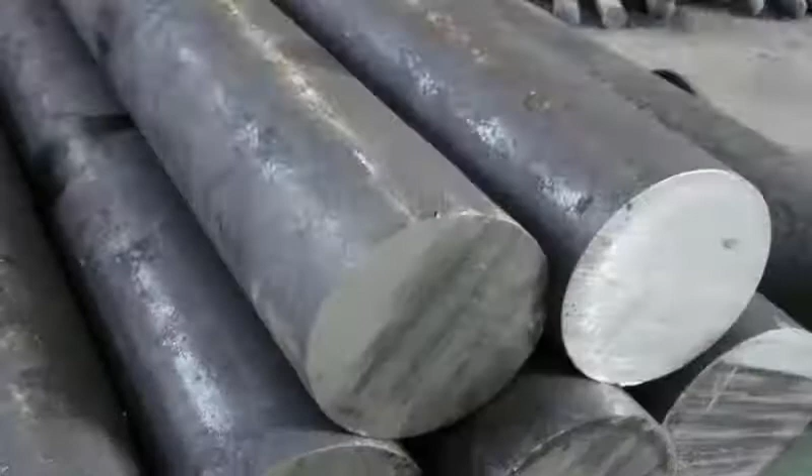So let's move to the topic of today. Have you ever wondered why steel is the only reinforcing material we use for concrete? There are several materials. We have gold, there is copper, we have iron, there is aluminium, and other metals and alloys. Of course, we can't use gold because everyone knows that gold is expensive, and it will be so uneconomical to use it just for reinforcement of concrete. Like, who does that? So if it is not gold, fine.

So why can't it be other metals, other materials, fibers? Any kind of material. For example, why can't it be iron? We all know iron. Steel itself is an alloy of iron and carbon. So why can't we just use iron, which is the original form of steel, to reinforce concrete? Why do we need to alloy it with carbon before we can use it?

I've been curious as well, so I made some research which I'm going to share with you today. But before I do that, I want us to recap on why we even need to reinforce concrete at all. This is different from the main topic. The main topic is, why do we use steel? Is steel the only material? But before then, I want us to talk about why we even reinforce concrete at all.

So let's get started. There are three major reasons why we reinforce concrete. We have several reasons, but these are the major ones. Number one is to increase the shear strength of the concrete. Number two, we want to increase the tensile strength of the concrete. And number three, we want to increase the compressive strength of the concrete.

These three strengths are so important in concrete. If you have a concrete that lacks all these three properties, then you are playing with failure. There are several reasons, as I've said, but the three major ones are the ones I've mentioned. There are others, like to reduce cracking, or to prevent sudden creep or sudden failure.

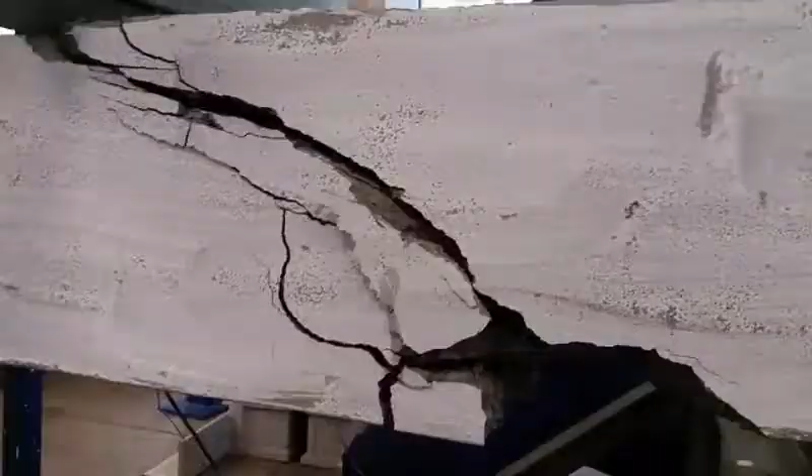Okay, so this is what shear failure looks like. This is a beam that has undergone shear already. This is the shear plane. Look at this diagonal plane. See this? That is the shear plane. The part of the beam at the right is trying to slip over the part of the beam at the left. So this is what shear failure is.

So this beam has undergone shear. Why? Because it lacks shear strength, or there is limited shear strength to it. There is no reinforcement in this beam, so it is a mass concrete. This is what we don't want to happen to our beam, so that's why we want to reinforce our beam. The shear stress being induced in this concrete due to the external load is greater than the shear strength of the concrete. That is why it is undergoing a shear failure.

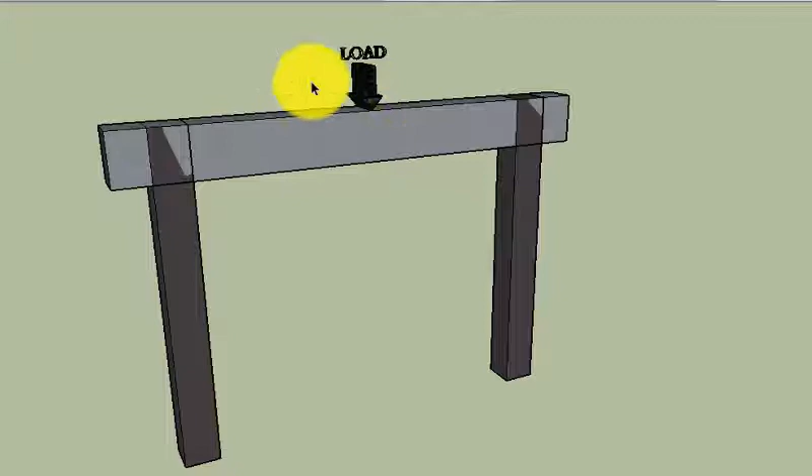So that's shear. Now we shall discuss what the compressive strength and the tensile strength are. Look at this beam. This is an overhanging beam that is supported by two columns, and it is loaded centrally. So what will happen to this beam if we increase the design load by just a little bit? Let's see what will happen.

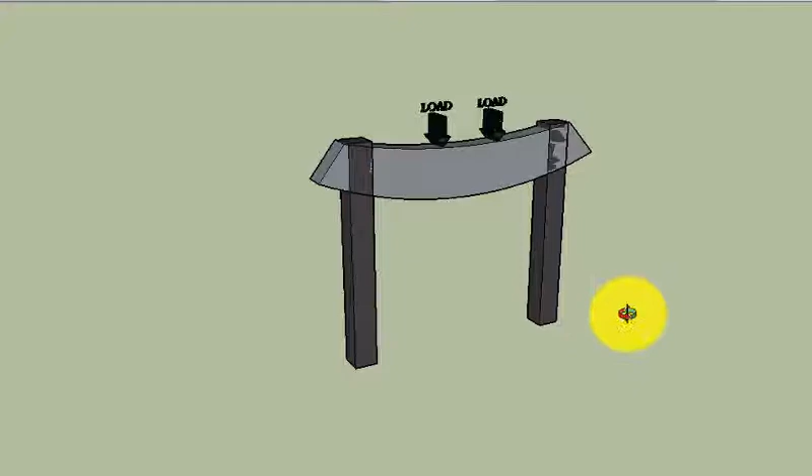Okay, so this is that same beam. You can see that same beam, but what has happened to it? Look at it. Look at this top fiber, the extreme fiber. You can see that it has deflected, and therefore it has reduced in length, meaning it is in compression.

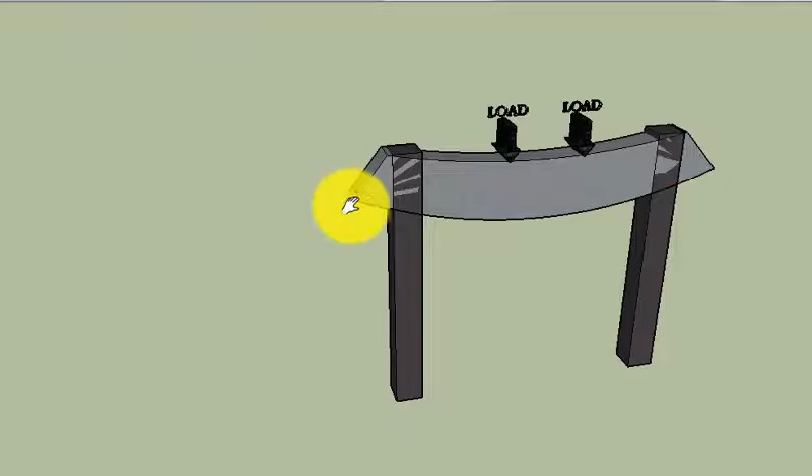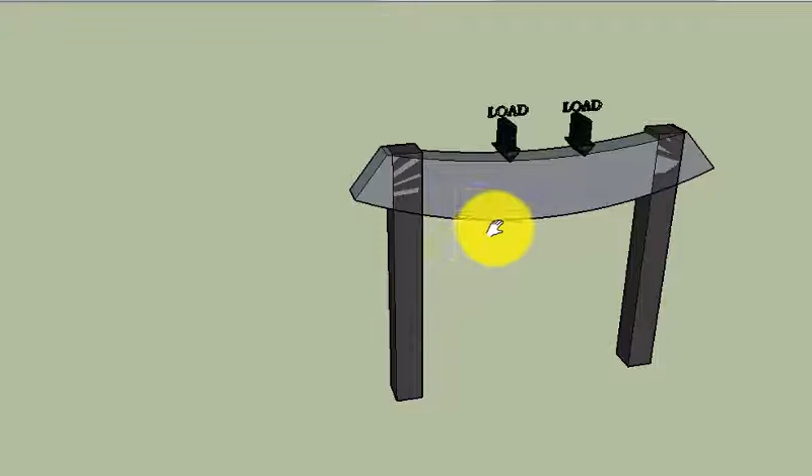So look at the bottom. It has also deflected, and it has increased in length, meaning what? It has experienced tension. So the stress they are experiencing for the top one is compression, and for the bottom is tension. So for the top, you need compressive strength to resist the compressive stress. For the bottom, you need tensile strength to resist the tensile stress.

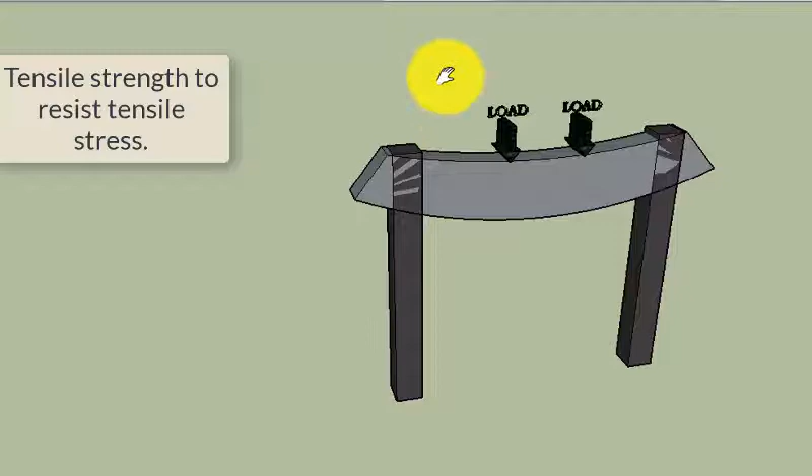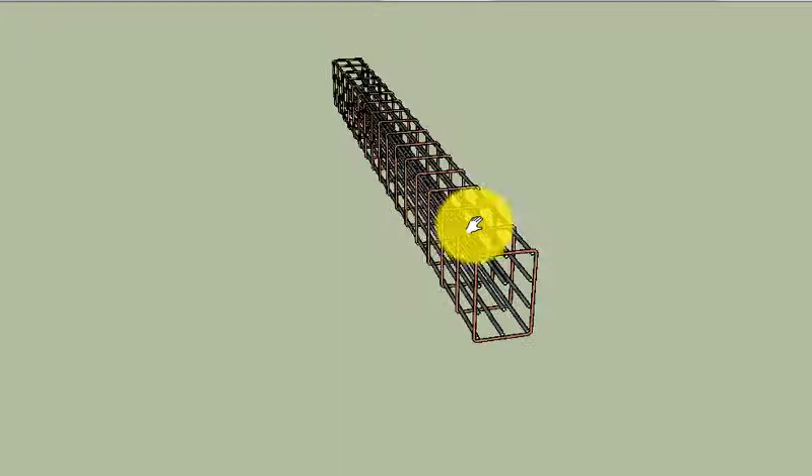So that's what tensile and compressive strength are all about. So what do you do to prevent that? Of course, you know that's reinforcement. Let's zoom in. So it means you need reinforcement. This is a reinforcing bar, a reinforcing steel. So it is made of steel. You can see it here. So let's look at the surface.

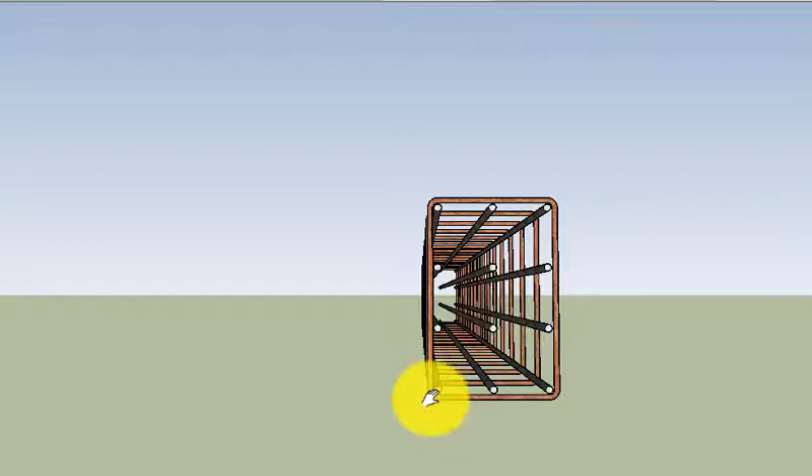So here you have 3 longitudinal bars at the bottom, and 3 at the top too. Let's discuss these 3 at the bottom and these 3 at the top. These 3 longitudinal bars at the bottom are to cater for the tensile strength of the beam.

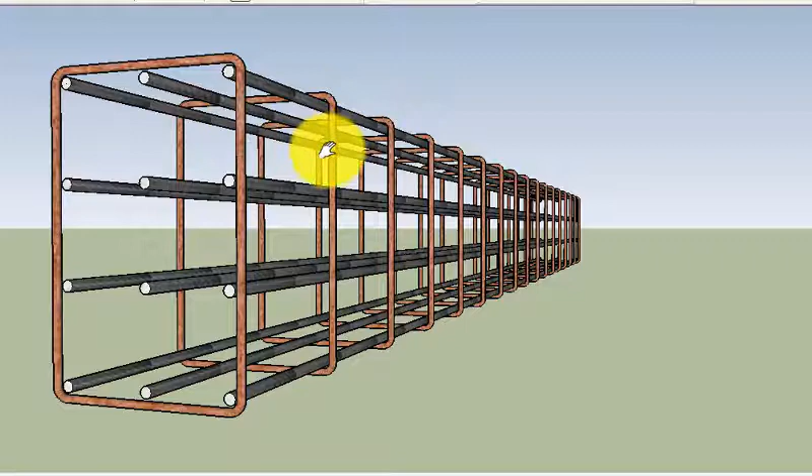And you see these 3 at the top, this 1, this 2, and this 3. The 3 longitudinal bars at the top are to cater for the compressive strength of the beam. And this stirrup, the link, this rectangular steel surrounding them, is to cater for the shear strength.

So why do we need to use steel? Why not other materials? There are 5 reasons, according to me. Number 1, steel has higher tensile and compressive strength than others. And as you've confirmed, what we need is tensile and compressive strength, and also shear strength. So we should go for a material that has high tensile and compressive strength. So definitely we have to go for steel, right?

Number 2, its coefficient of thermal expansion is approximately equal to that of concrete, meaning the expansion of the steel will be equal to the expansion of concrete. So they are very compatible. Number 3, it is cheap and recyclable. Number 4, it can be welded easily if you don't want to use binding wire. And number 5, it is readily available in the market. So of course we have to choose steel because of these reasons.

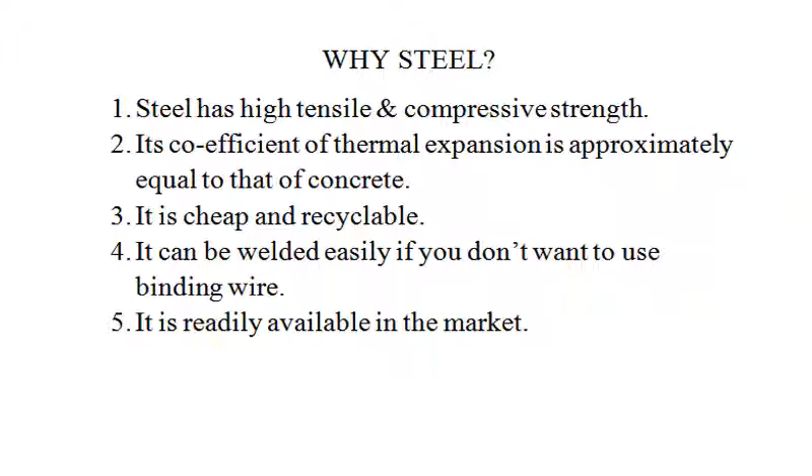But what about iron? Iron is the original form of steel. Why not iron? Number 1, iron is too heavy and will result in an increase in the dead load of the concrete. Number 2, iron possesses impurities which could cause carbonation and reduce the mechanical properties of the concrete. So because of this, we don't want to use iron.